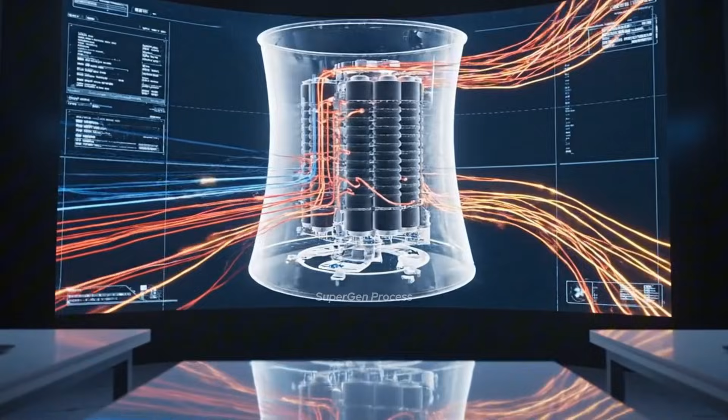The stress visualization confirms the turbulence. Monitor the boiling margins in that accelerated region. Analysis complete. Activating the failure scenario now. We have primary pump failure. Initiating recirculation protocols. Watch the secondary cooling lines.

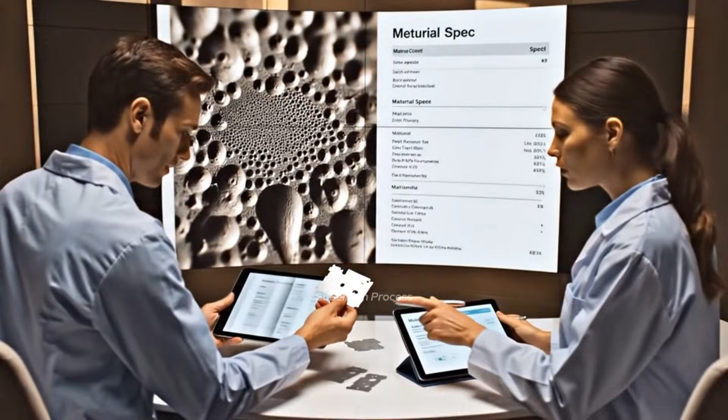According to the material certificate, the yield strength is significantly higher than expected. Vessel components start as massive steel ingots, cast from carefully controlled nuclear-grade alloys.

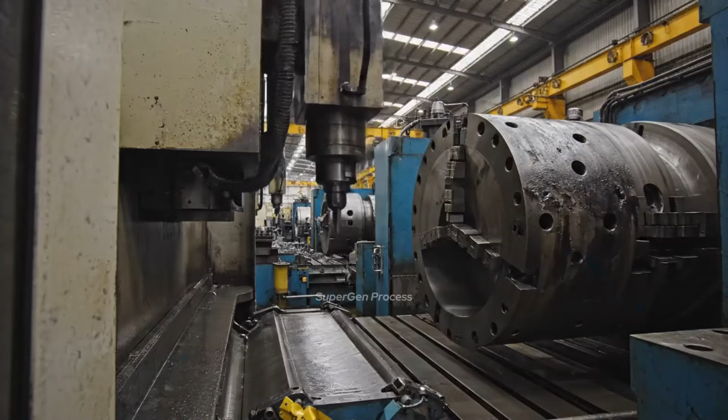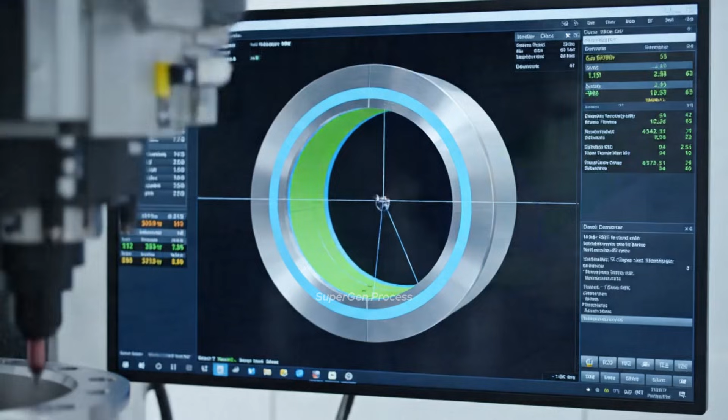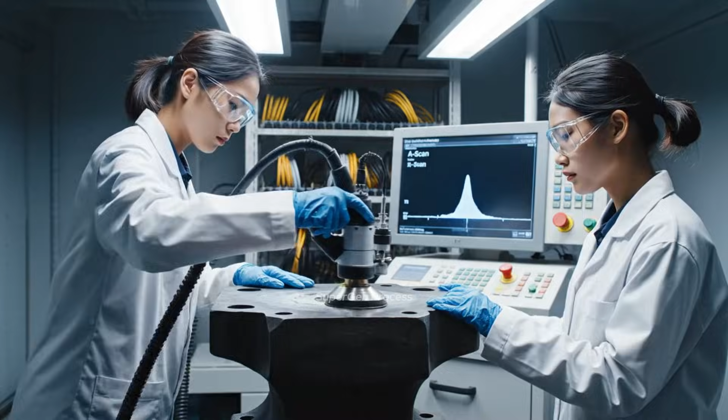Base, this is Unit 4. Surface prep on Ring Assembly 3 is complete, ready for inspection. Fine machining brings the vessel bore into micron-level straightness and surface finish.

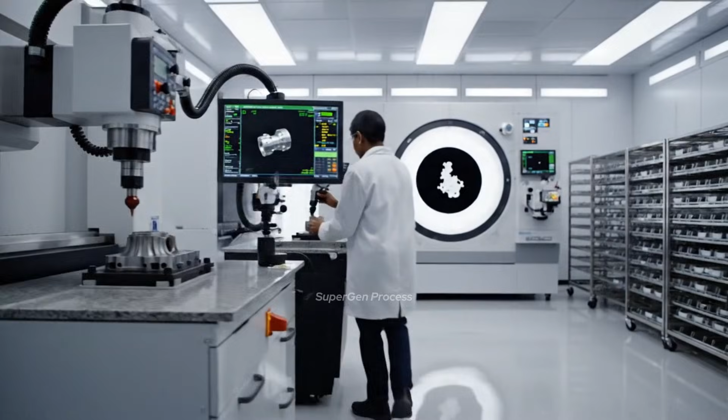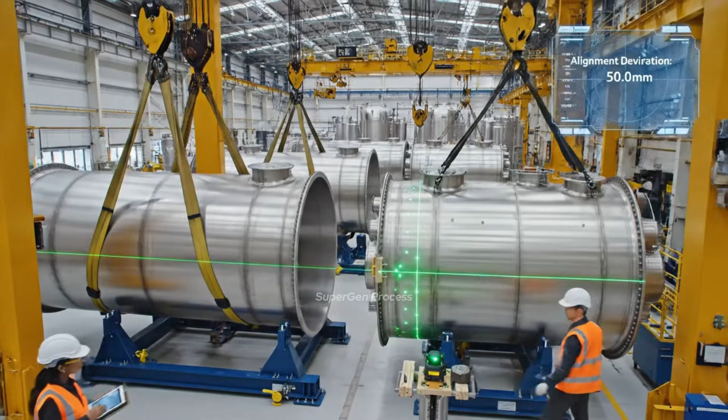Massive vessel sections are aligned with laser-guided precision before welding into a single pressure boundary.

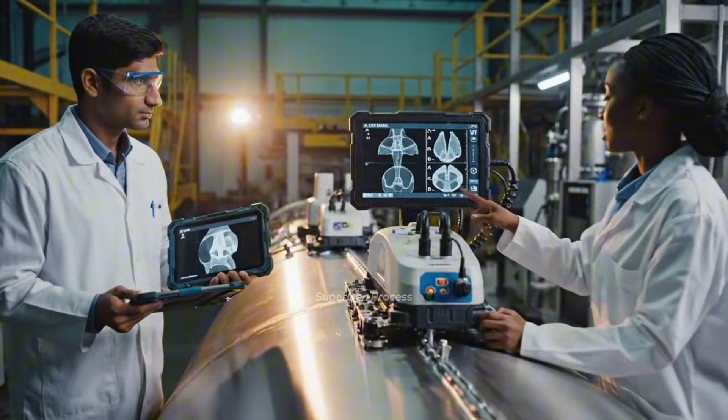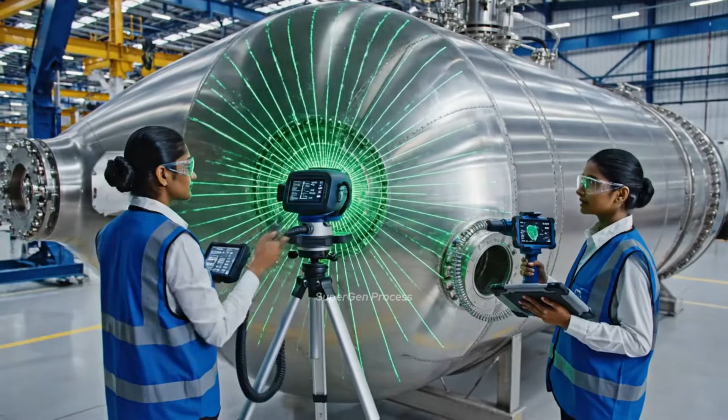Within a controlled environment, the reactor's internal structures are assembled for accuracy and cleanliness.

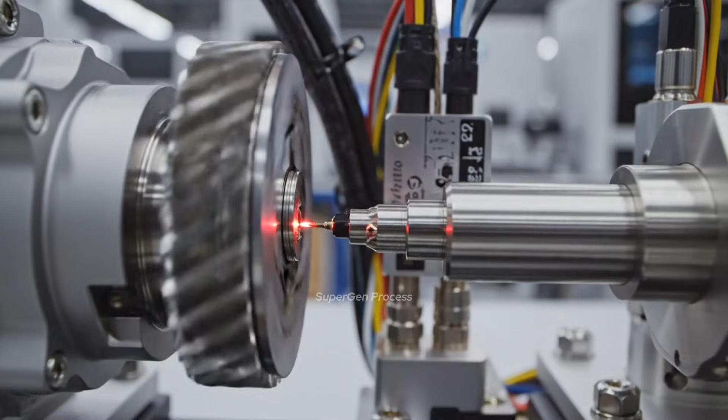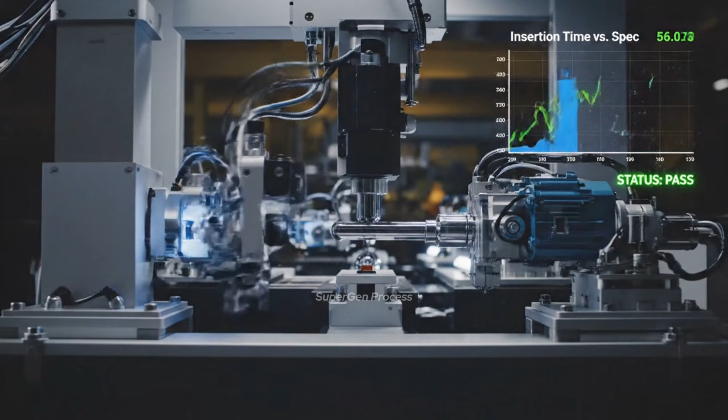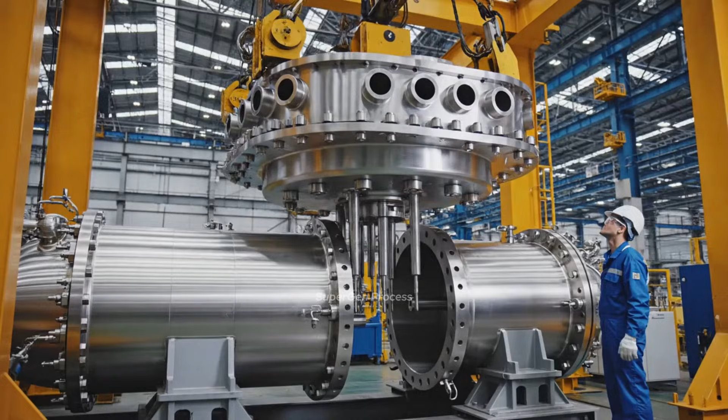Slowly now, bring it down gently. Watch your clearance on the left side. Okay, easy, easy. It's set. Around the reactor vessel, primary loop equipment circulates coolant and transfers heat to the submarine's power plant.

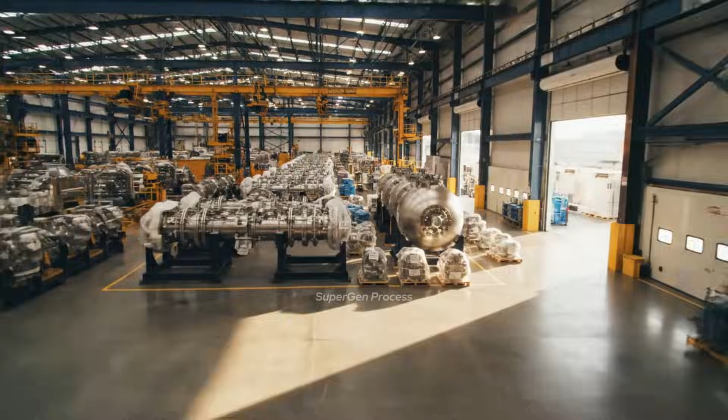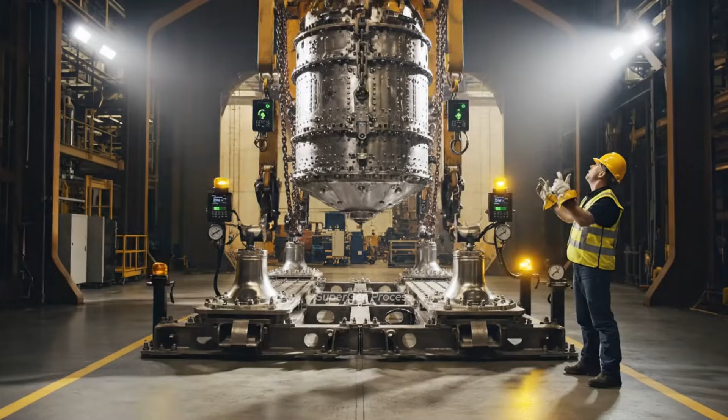A full-scale compartment mock-up replicates submarine space constraints for precise reactor module integration. Bring it down easy. Watch your clearance. Slow down, slow down. All right, secure.

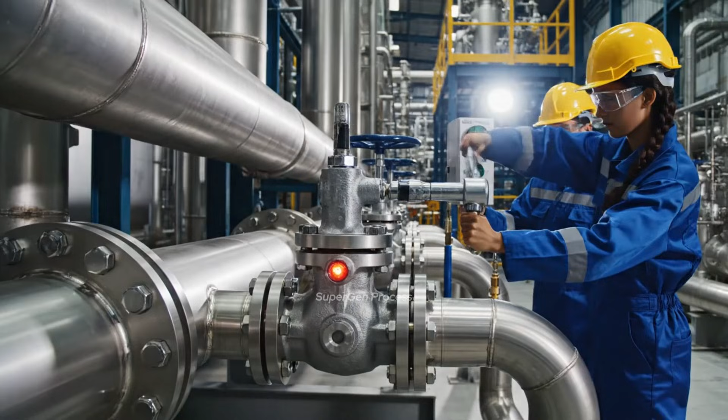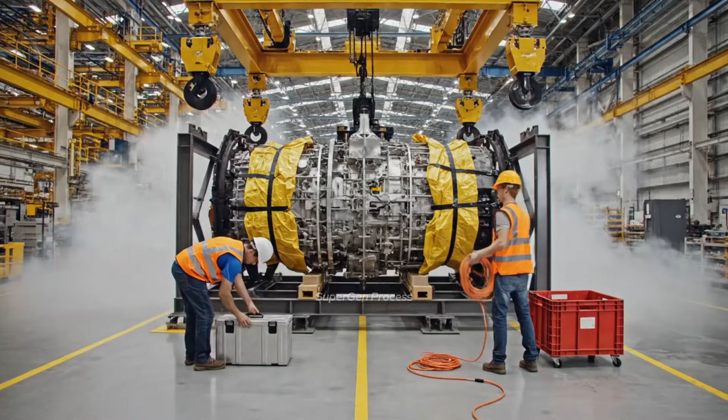Clear here. Looks like 45 centimeters to the insulation. 45. Got it. Check the emergency route next. Checklist complete for Module 4. Tools secured, lugs installed. Confirmed. Ready for transfer. Control panels provide the human interface for monitoring and operating the reactor.

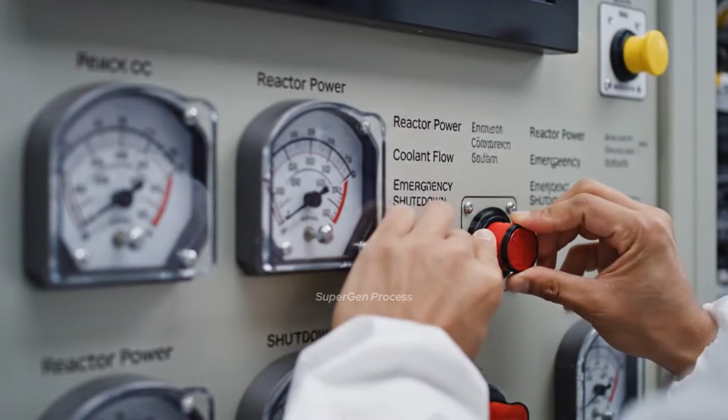Over-temperature alarm on channel 3. Acknowledged. Initiating scram sequence now. Confirm trip logic active. The reactor power looks stable at 50 megawatts. Acknowledged. Check the coolant flow rate on panel 3. Comms check successful. We are reading a slight variance on the R3 gauge. I see it. The hotspots confirm operator focus remains stable.

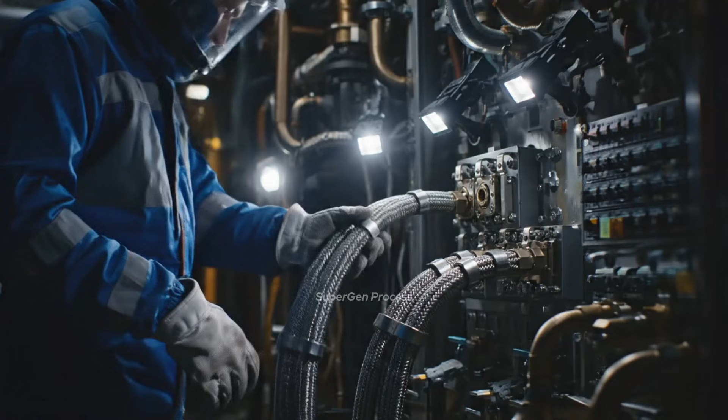Power levels spiking in reactor 1. Initiating scram sequence now. Verify coolant flow immediately. We need stabilization before it hits the trip limit. Sequence initiated. Cycle the main coolant valves now. Confirmed. Pressure stable. All systems showing nominal parameters. Reactor module verified. Good work.

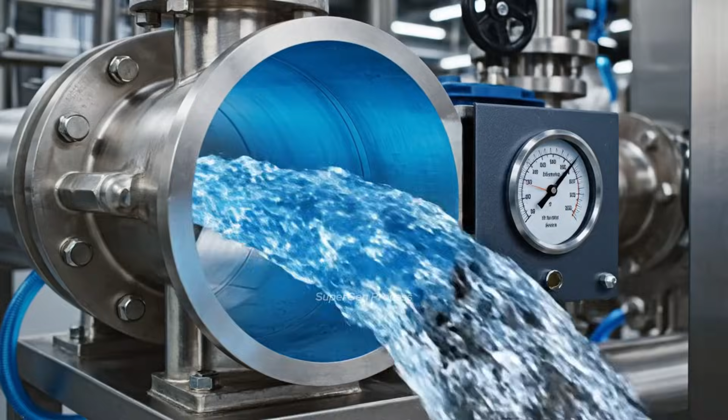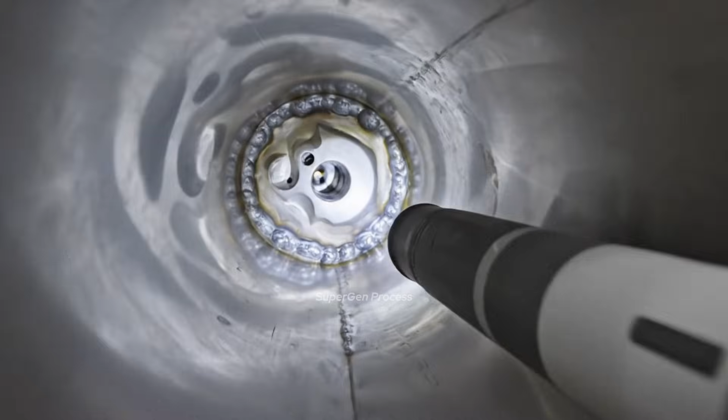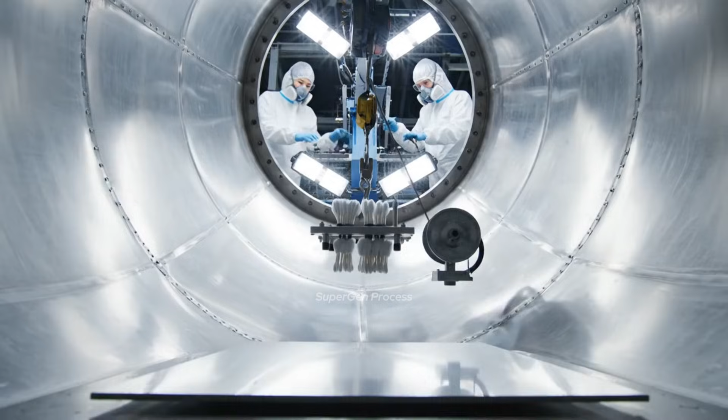Before any fuel comes near the reactor, cleanliness standards tighten to protect both components and nuclear safety. Swab complete, beginning retrieval. Copy that. Analysis shows minimal particulates. It's a pass. Review complete. All conditions are met for fuel loading. QA approves the release.

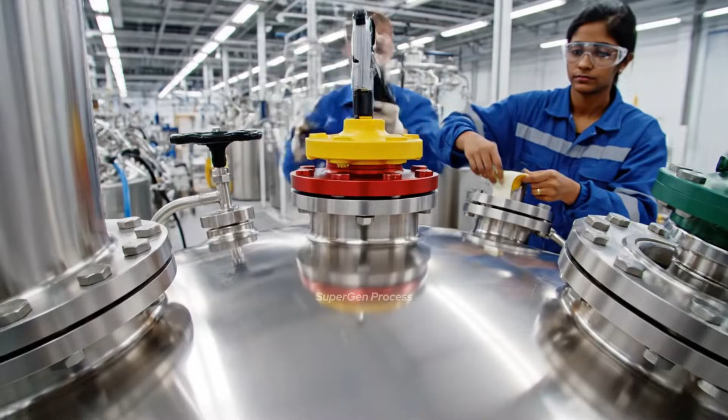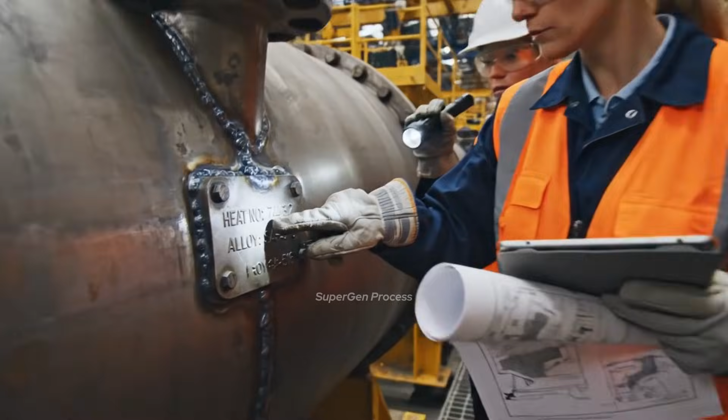Independent regulators and naval authorities scrutinize every stage of the reactor's build. The heat number here is 7432. Verified against the material test report. The weld looks good. All right, let's review this section. Flawless weld. Accepted. The core damage frequency is now well below the acceptance line.

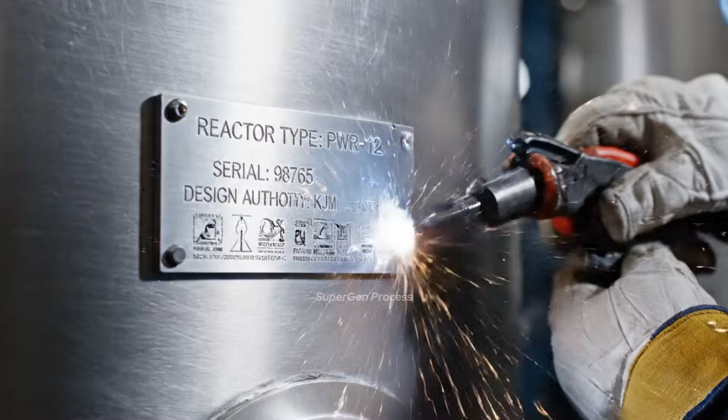Does this account for the seismic reassessment? Yes, it includes the updated external event data. The certification is approved. We still need to finalize the documentation and ensure all conditions are met before deployment.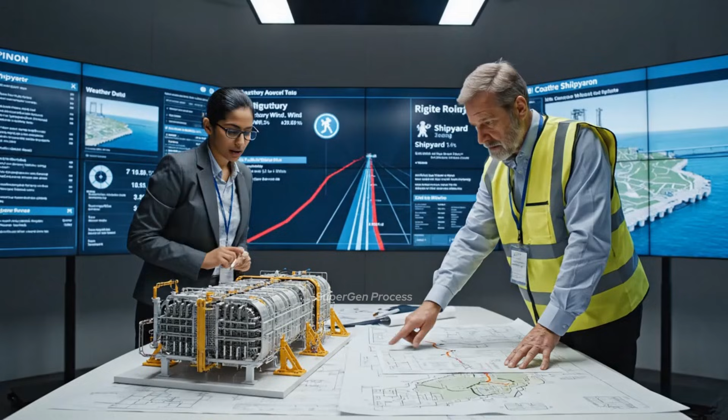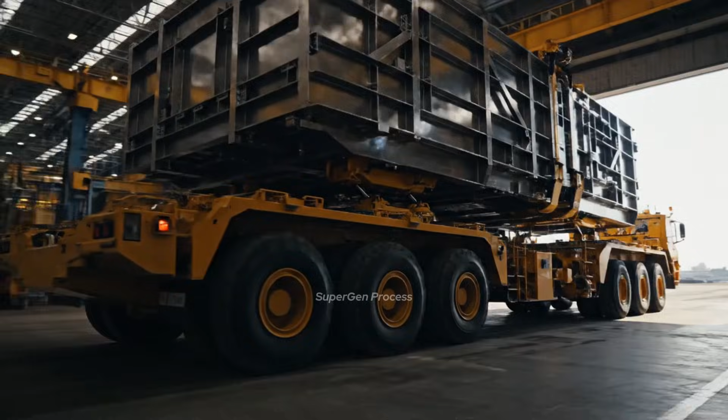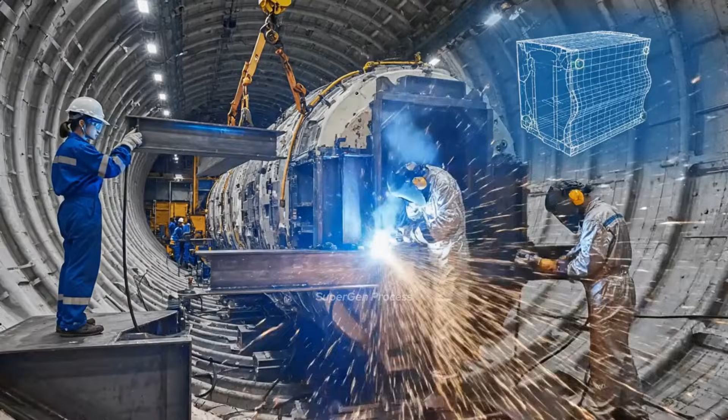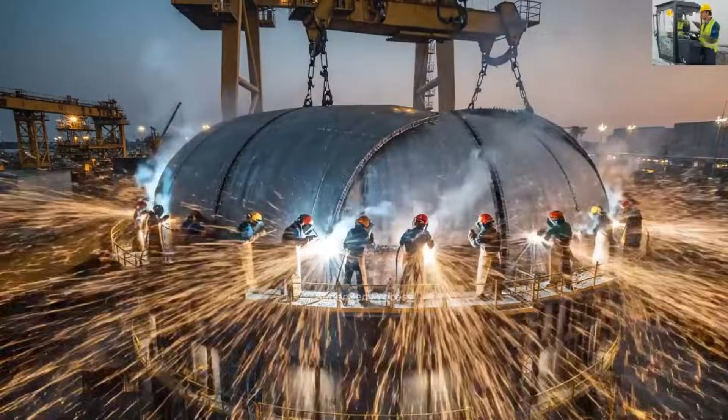Moving a nuclear reactor module requires meticulous planning to manage weight, balance, and safety. Continue descent, slow and steady now. Watch the starboard side. Copy that. Starboard clear. All clear. Set her down. The clearance on the red cable seems tight. It's within the parameters. I'll make a note on the sheet.

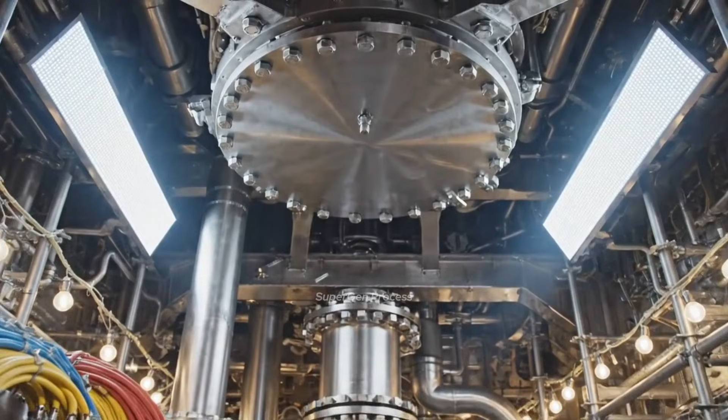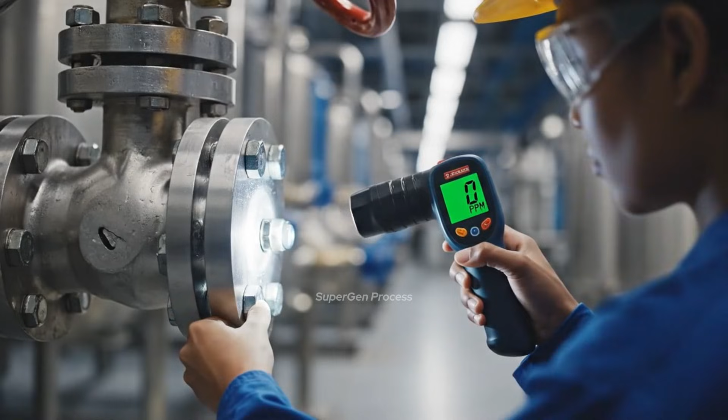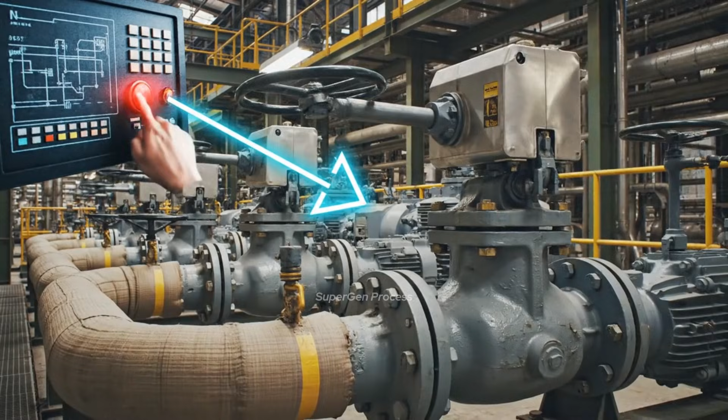At the pier, the submarine systems are connected to shore for integration and testing. Control, this is primary loop. Injection proceeding as planned. Levels are stable and bubble-free. Reading is stable at 150.02 psi. Matches the reference standard. Calibration complete.

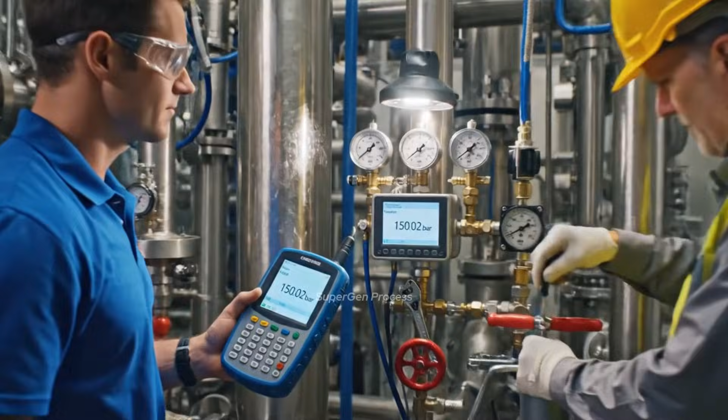Check the primary loop pressure immediately. Alarms are confirmed. Pressure stabilizing. Engaging secondary coolant now. Control room to maintenance, the test was a success. Simulation holding steady at maximum output. Live test successful. Thumbs up confirmed on Channel 3. Cold commissioning is complete. We are ready for the next phase. It's been a long road.

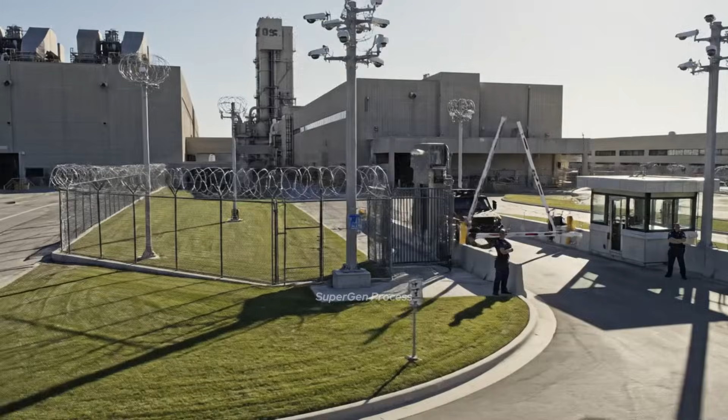Congratulations. Nuclear fuel fabrication occurs at specialized, secure facilities under strict international safeguards. Specialized transport moves fuel under tight security and regulatory oversight. At the dock, specialized handling systems prepare to safely transfer fuel into the reactor compartment.

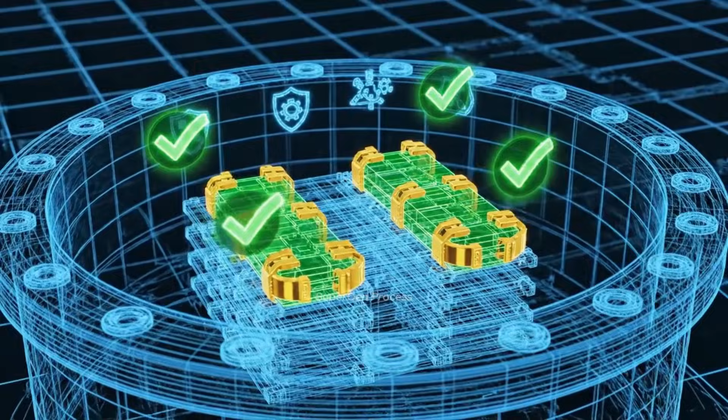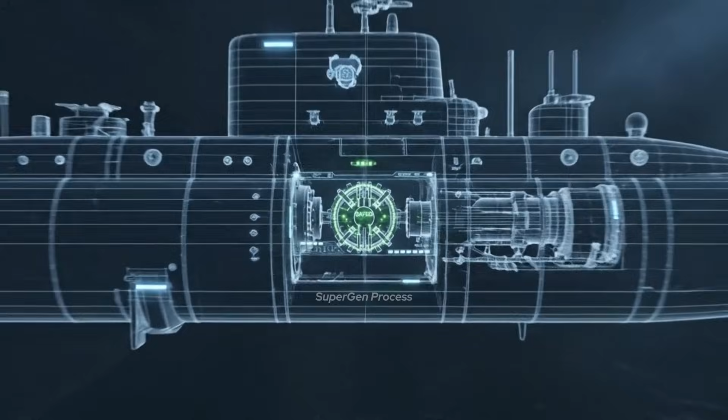Checklist item 12, verified and logged. Confirmed. Status remains green. A detailed briefing precedes any move toward first criticality.

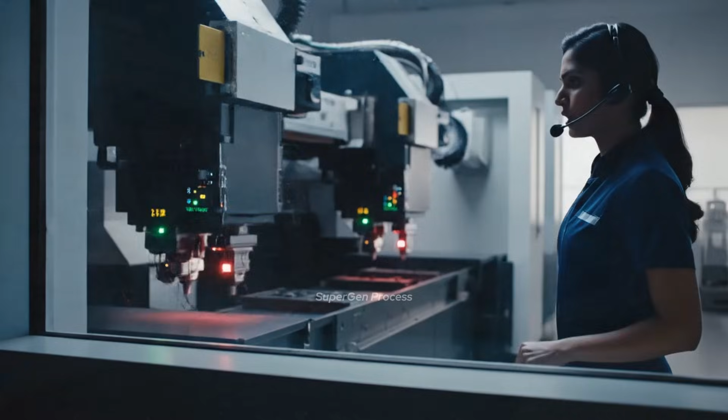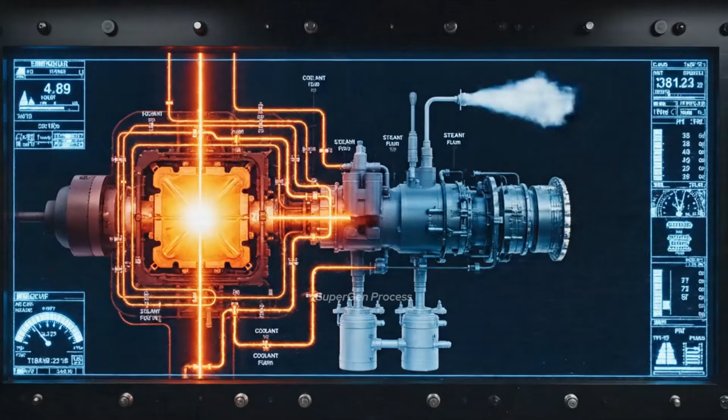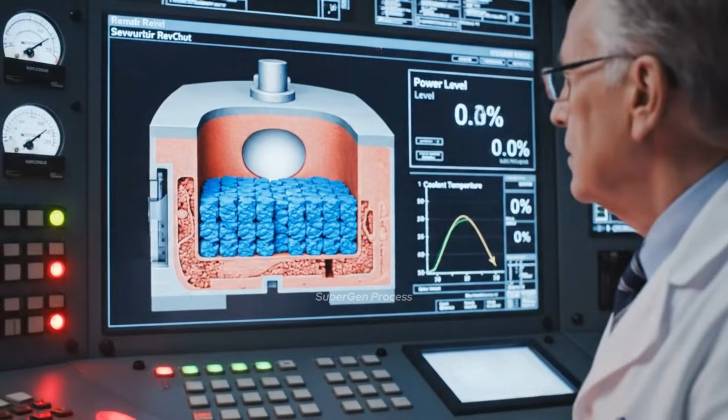Initiating reactor scram. Verify rod insertion and monitor neutron flux. We have confirmation on low power physics and hot functional. The data supports the conclusion. Sign off on criticality. All items complete, sir. With trials underway, the submarine tests the reactor under real seagoing conditions.

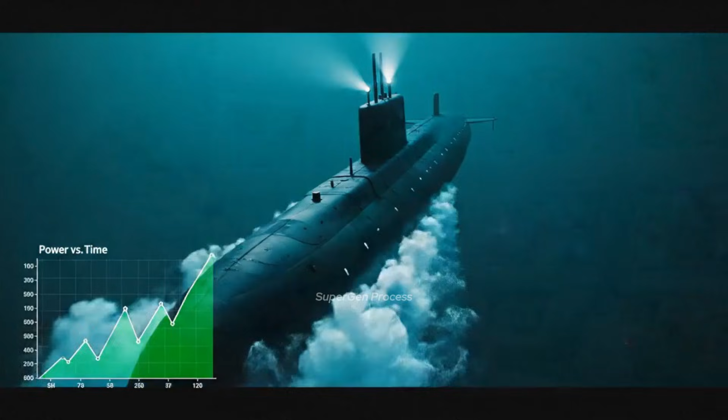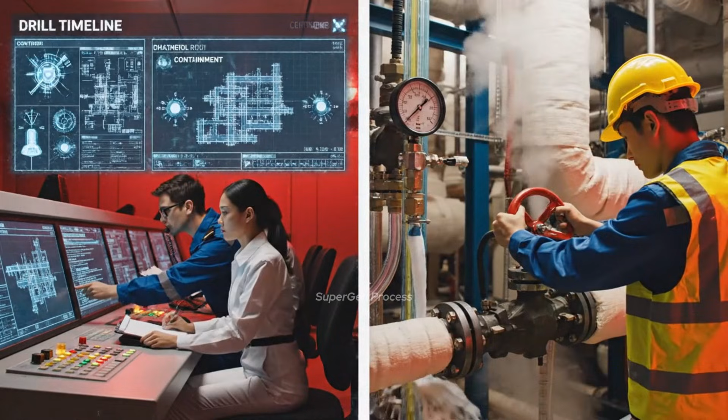We have a partial power failure in Sector Gamma. Reroute coolant flow immediately. Control to maintenance, check valve 7B. We have flow destabilization. Ramp up complete, holding steady at peak capacity. Initiating controlled power down sequence now. All systems nominal.

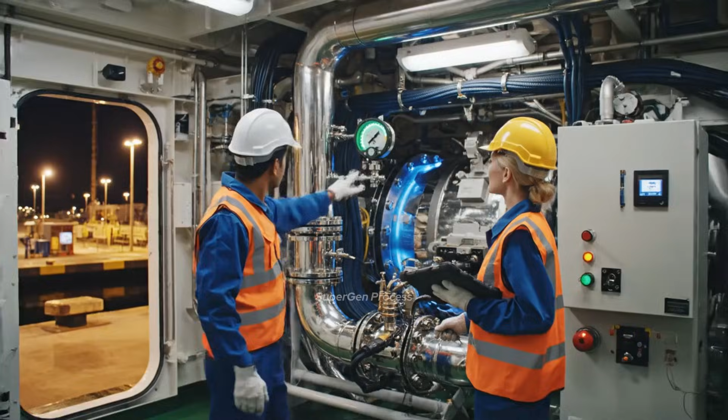It is my honor to accept this plaque and formally recognize the successful completion of the reactor plant. Unit 7's indicators are fluctuating. I'm pulling the thermal data now.

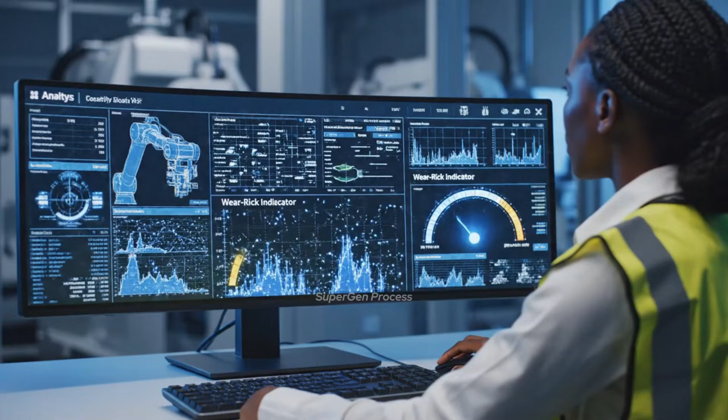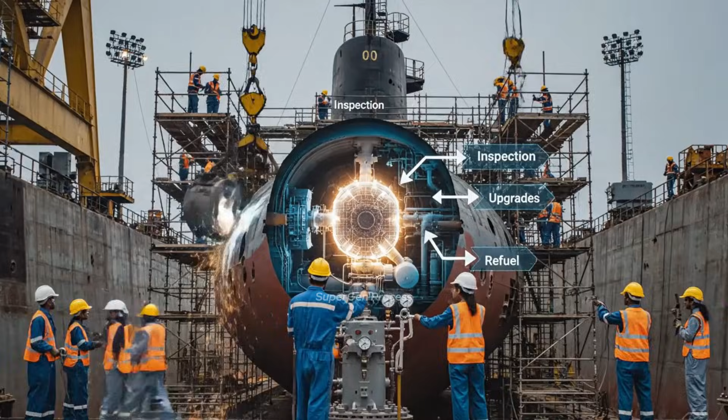Powering up the new rack now. All parameters nominal. The upgrade is complete. The fluctuation spikes correlate directly with the degradation incidents. But the improvement data suggests we can integrate the new moderator design to compensate.

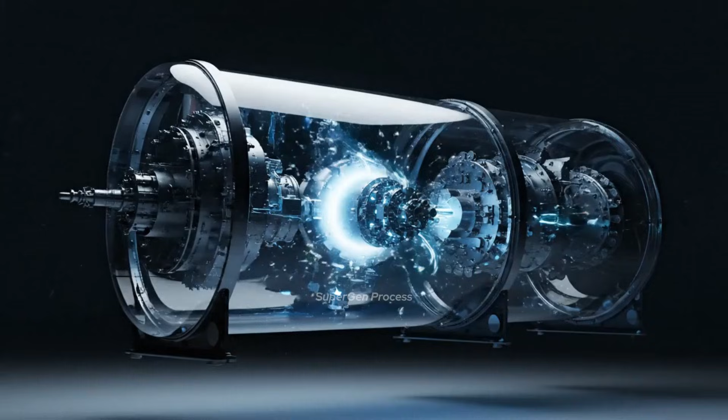And that's how nuclear submarine reactors are made, from start to finish.